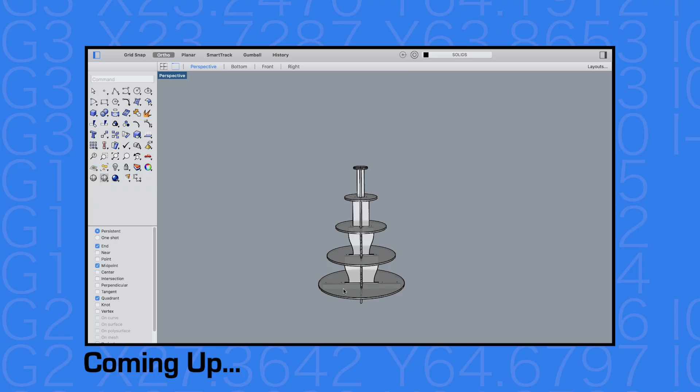Christmas is not very far off and we got a neat holiday product that actually started as a photograph. I'm going to show you how we brought that to life. Let's get started.

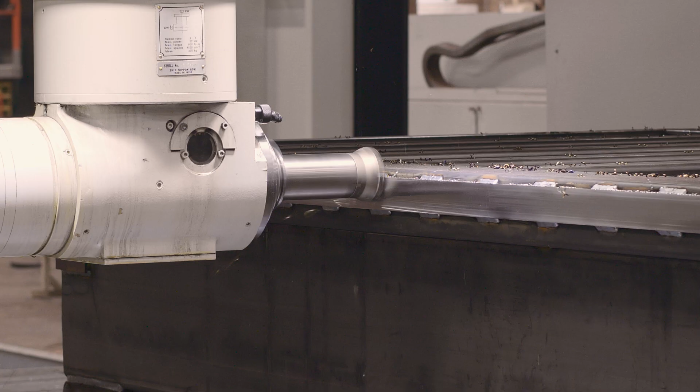The ISM Series represents our highest level of technology at ShopSabre, and they're part of our machine tool grade router group. The base frames are structural steel, all welded, single piece. All the machining is done in a single setup on an aerospace mill, which is where you get so much accuracy and such great edge finishes. We use that same technology when we fabricate the gantries.

Ball screw technology is an important part of being a machine tool grade CNC router. Ball screws eliminate play, can handle heavy loads, and are virtually maintenance free. That concept also carries over to precision contour guide rails, which also operate with ball bearings. Bottom line, you get better parts and better accuracy because of this technology.

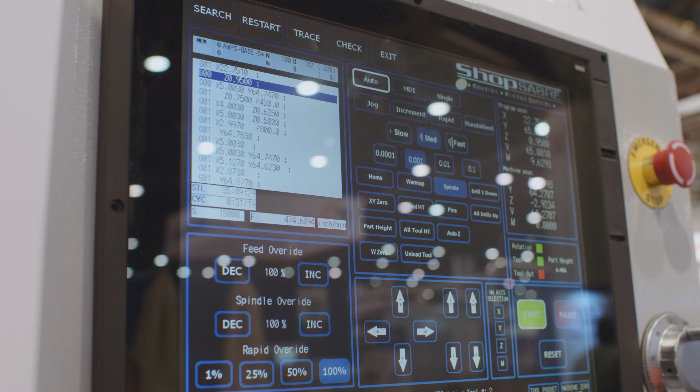The ISM Series CNC routers come standard with the world's fastest dedicated machine controller, the Mitsubishi M80. One reason the controller is so fast is because the internal communications are all handled with fiber optic. But there's another part to machine control that has to do with the servos and drive motors. The closed loop digital servos have glass encoders that supply 1 million counts per revolution. With that much data available and the speed of the control, you get really high performance on the machine and extreme part accuracy.

But we were able to accomplish all that and still maintain the ease of use machine control that we're famous for at ShopSabre.

This machine features our optional 10-position carousel tool changer with HSK tool holders and the optional 13 horsepower HSD spindle. And we have a 9-spindle boring block that we'll be using in our demonstration today.

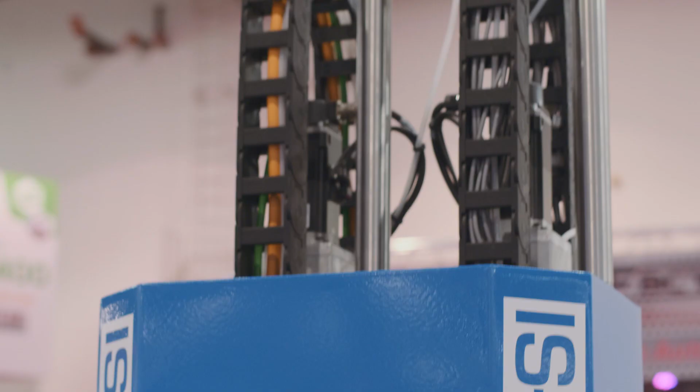The machine we're using today features our exclusive ShopSabre Super Z technology. It starts out with balancing cylinders, which bring you faster 3D machining and faster drilling. It comes with our tool plate stiffener system, which equates to better edge finishes and better accuracy. And finally, all of this is driven by a closed loop digital servo driving a ball screw.

This machine features our exclusive ShopSabre high-flow vacuum technology. It starts out with a table that's totally machined on the machine itself, so it lines up perfectly with the spindle. In fact, it's so accurate you don't really have to have a gasket between the table and the spoil board. The grid system we developed to interact with the spoil board has about two-thirds more flow than a typical universal table, so you're going to get more vacuum to hold your parts.

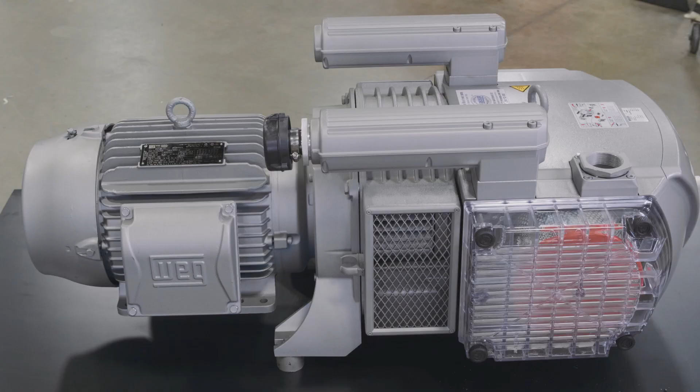We connect that internally with hard pipes, and they're large hard pipes. In fact, there are 4 zones on this that you can control. Those hard pipes flow into a large frame component that becomes a vacuum plenum. Then to the back of the machine, we feed a 4-inch hard pipe, and on the end of that pipe we connect brand name vacuum pumps.

This machine features our optional part locator pins, which makes it easier for you to load and unload the machine.

Now that we've talked about the machine, let's go in the office and actually look at the project we're going to produce. This is a time of year when people start putting up holiday stuff. They put up Christmas lights and you see stores decorated. We also like to do some kind of Christmas project this time of year, and this year we've got something really neat that I think is going to make a great video.

We started with basically just a photograph of a Christmas tree display. It's really a series of shelves in the shape of a Christmas tree. All we had was a basic concept, so we started from scratch and designed this. I want to show you the steps we took to accomplish this.

We basically did the design work with VCarve PRO, but I took those parts and created a model and render just so you could see what the project's going to look like.

Here's the final design, and it's basically a Christmas tree shape. You can see what people do is they put all kinds of little things on here. In fact, you might have a little train going around here. It really creates a great place to display your Christmas ornaments and things, and when you're done and it's decorated, it kind of looks like a Christmas tree.

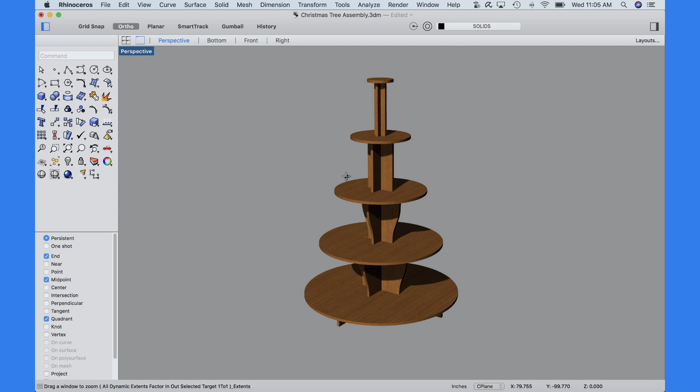So let's take a look at how this thing's actually put together. This is a ghost view, so you can kind of see inside. Basically, it starts out with 2 pieces that form what I call the trunk, and they actually fit together.

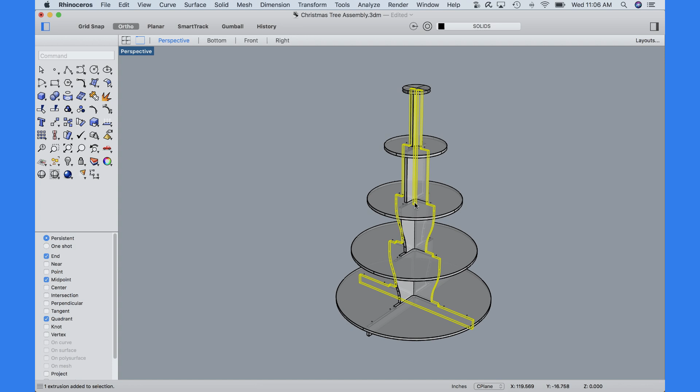Here's what the other one looks like, and they have a notch, so there's a lap joint in the middle that forms the tree trunk. And then these discs, there's 5 of them, actually installed from the top. They go down and rest on these surfaces down here, so they get stacked, and that gives you the ability to assemble and disassemble it. So that's the idea, and then the top is flat, so you can place something on there.

So that's what we want to create. Now let's take a look at VCarve Pro, and I'm going to walk you through the steps of how I actually created this design.

The project had to be made out of 3/4 inch 4x8 sheets of Baltic birch. I selected Baltic birch because there aren't any voids in it, so it's a really nice material. Now, I already decided the disc was going to be 48 inches, so the next thing to do is figure out what the height's going to be. Let me show you how I did that.

The job setup is single-sided. The material's 4x8, it's 3/4 thick, and we're touching off to the top of the spoil board.

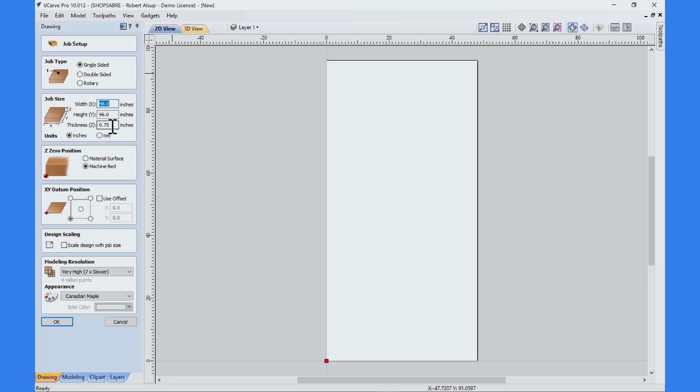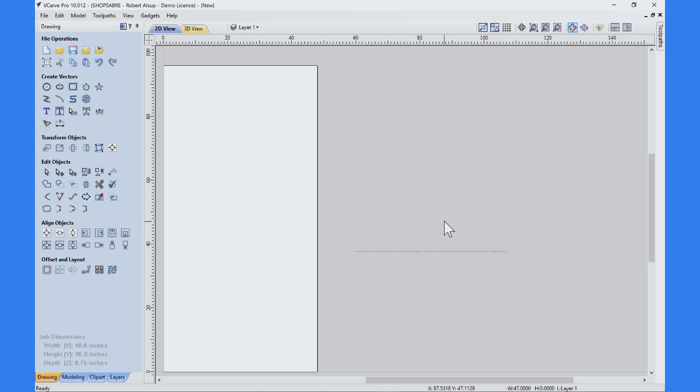Now we need to make some drawings. Let's start over here where we've got a little more space. Let's start with a line first, and it's going to be 47. So what I'll do is draw the line and then just size it, and I'll tell it I want that to be 47. Now that represents the diameter of the base of the tree, or that bottom shelf that you see.

So that's what starts. Now the question becomes, how high is it going to be? Well, here's what I know: the height's going to be from a midpoint, and we'll just select that, and then resize it this way. So we'll say, okay, I want to anchor it down here. All right, now what size is it going to be? Well, right now it's 58.

Well, let's calculate it. To get the golden ratio, basically the height has to be 1.618 times the base. We know the base is 47, so 47 times 1.618 equals, and that gives us our height. Now that's that magic proportion, that's the golden ratio, so now our tree should look great.

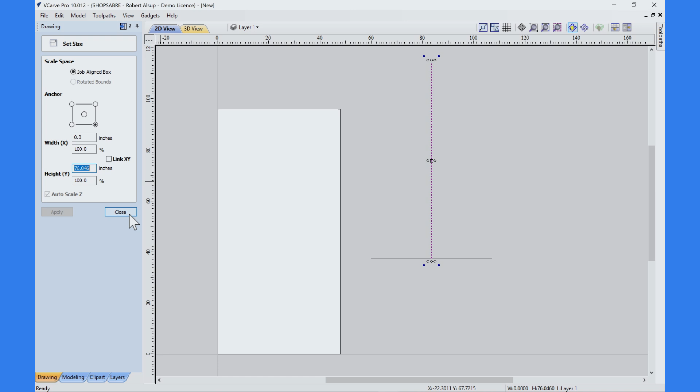Now, once we've got that done, let's put some more lines on here. Let's connect that to that, and we'll do the same thing here, so that becomes a cross section of our tree. The base of our triangle is actually the surface of the bottom shelf.

Let's put the top shelf in. So we'll snap to that point, draw a horizontal line, and move it. I'm going to move it down 12 inches, so relative Y position minus 12. That gets it at the correct height, and then move it over, and we'll trim it. So we'll get the scissor tool out.

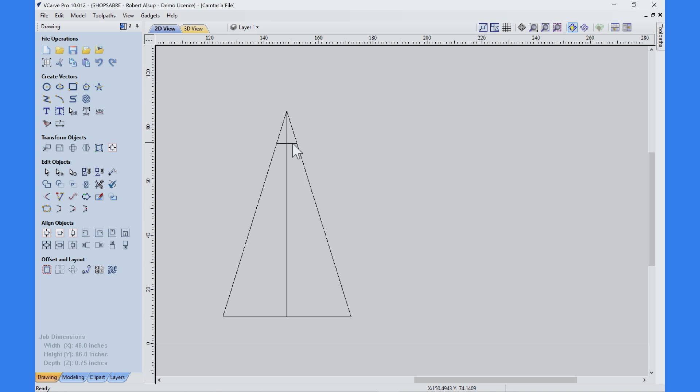So that becomes the top surface of the top shelf, and this is the top surface of the bottom shelf. Once we know that spacing, we can figure out the other spacing.

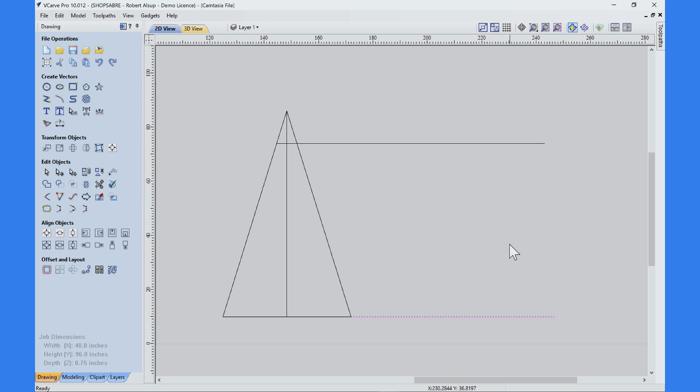I'm going to show you a way to do this without calculation. It's real simple: you start out with a line, so we'll snap to right here. Draw it horizontal, doesn't matter the length. Same thing here. Then we'll draw a vertical line, and once again it doesn't really matter where you put it.

We'll trim that with a scissor tool. Select that line and use the array tool. We're going to do 5 columns 3 inches apart.

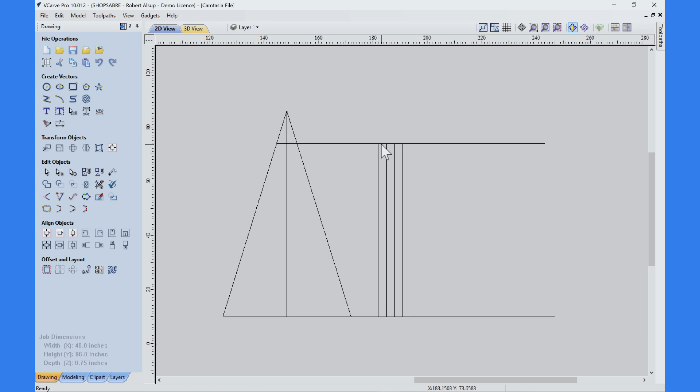Now we're going to create a diagonal from here to here, so let's do that. So draw a line, we'll snap it here and snap it there, and you notice some intersections form. Here's 1, 2, 3 -- that happens to represent the height of those shelves, and it's equal space. So snap to that, just go across it, same thing, and finally we'll do the third one.

And then all we have to do is use the scissor tool to clean those up. And finally, let's get rid of this.

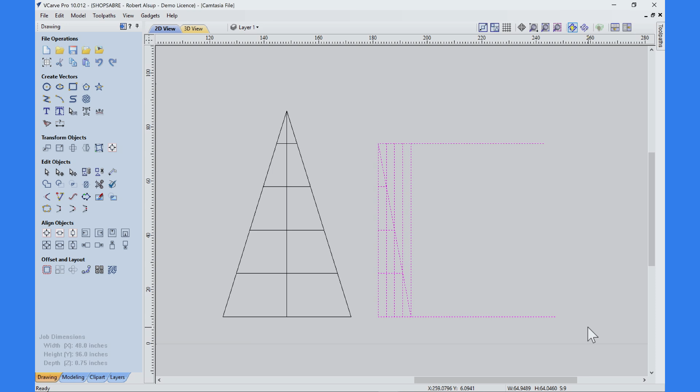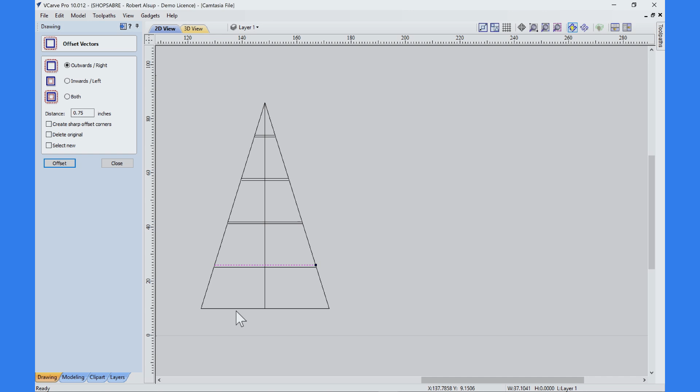Now we'll use the offset tool to actually create thickness. So we'll see if that's correct. Okay, that's correct. And that's correct. And that's correct. I believe this bottom one was drawn differently. That's correct, so perfect -- now we've got the actual thickness of these shelves.

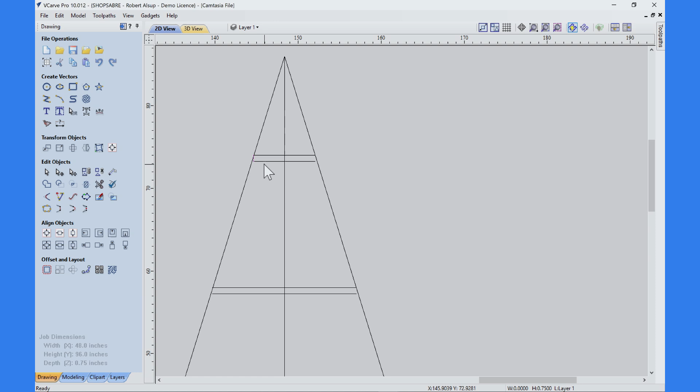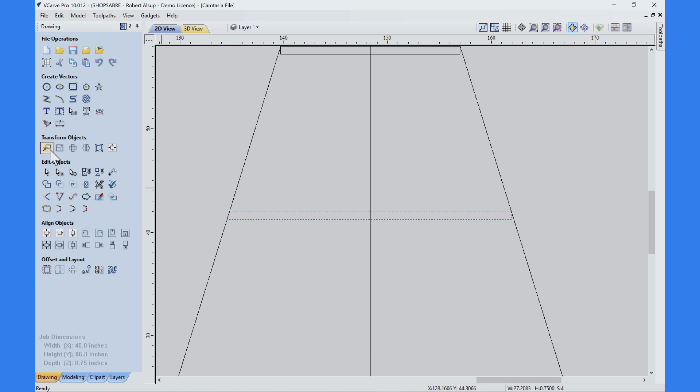Now let's draw the ends on these shelves. So we'll go from there to there, get a little closer, and then we'll join that. Same thing here, join that. Same thing here, join those. Same thing here.

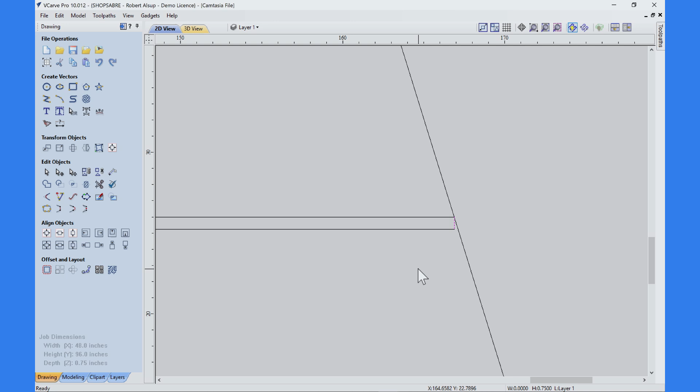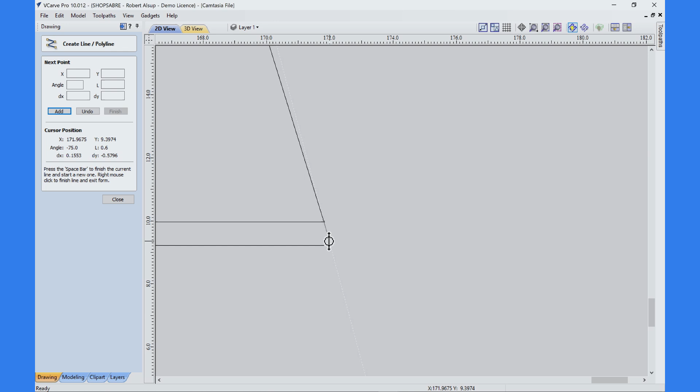Join those. And finally, we'll do the bottom one. And finally, we'll join those.

Select the shelves. This time let's right click, move to layer, new layer. We're going to call this layer shelves, and we will make it red.

With the overall shape of the tree defined and the shelves in their places, now we can get started on designing the trunk.

Let's make a copy of our tree, so I'll select it, right click, copy, right click, paste, and then I'm going to select it and drag it over here. We'll actually work on this.

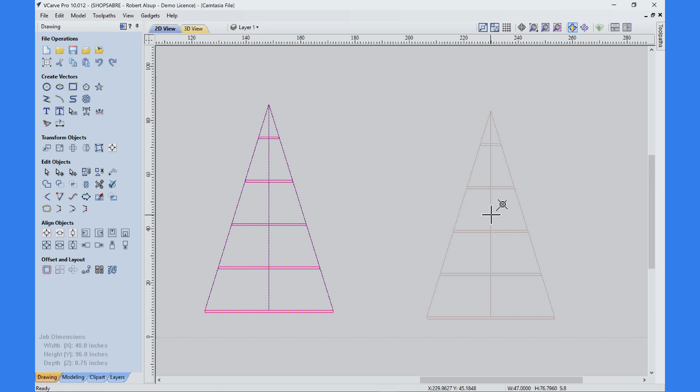Okay, let's take the scissor tool and let's get rid of half of this. So we'll get rid of those. Get rid of that.

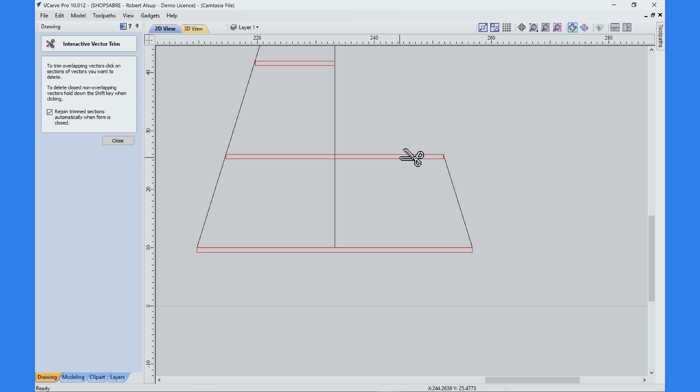The reason is when we're designing the trunk, we really only have to worry about half of it because we can mirror it once we get it done. To make this clear, let's go ahead and put those back on that layer called shelves.

Okay, so that's what we have to go with. Now what's going to happen is we're going to have to put these shelves on, the biggest one at the bottom. So let's do this first.

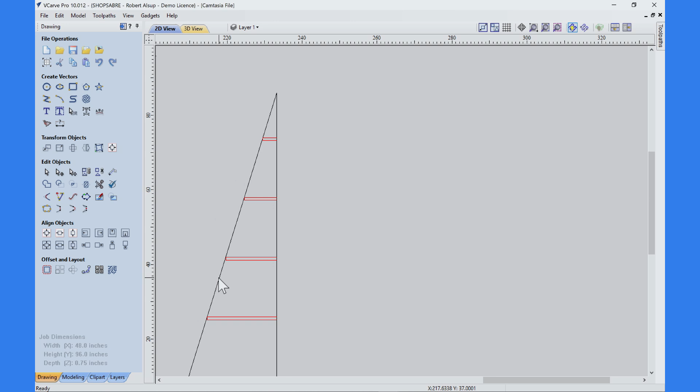Okay, so let's say, all right, I'm going to go from this start point at the midpoint straight down, and then we'll trim that. So that's how we'll determine where each one of those lines is.

So that starts at the midpoint of that shelf, down to here. Same thing here as we'll just keep going down. And that determines our spacing. There's the midpoint.

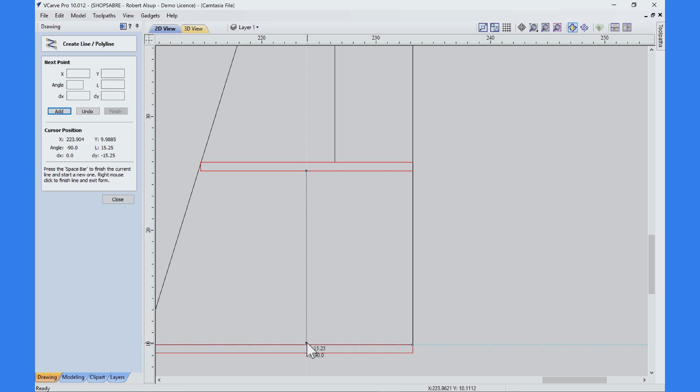That looks great. Okay, let's go down here to the bottom. We need to add our base rail on here, and it's going to be about 3 inches.

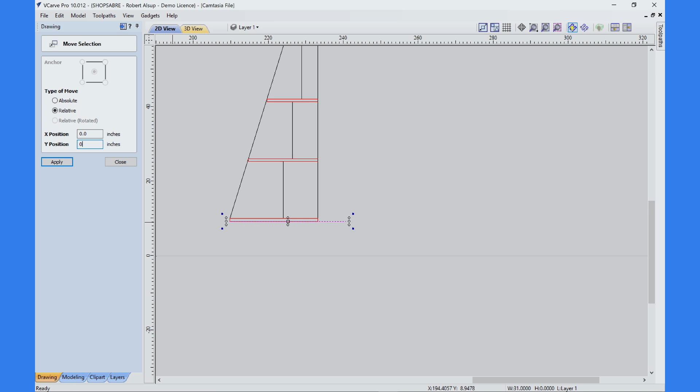So let's just do this. Let's bring it out here, and then let's just move it down relative to where it is, minus 3. And then we're going to actually move it back 3.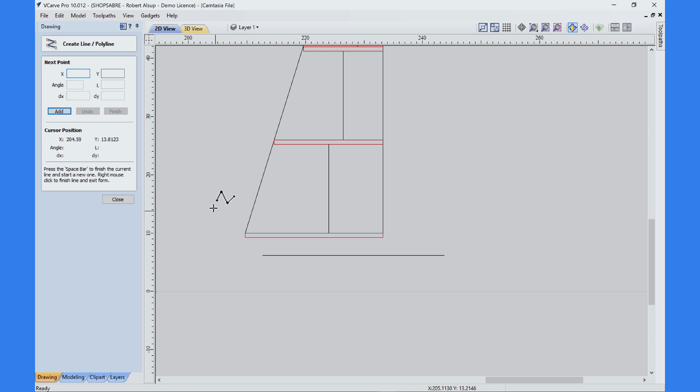And then we'll finish our line. So then we'll bring this up. And we'll bring a line down here. And we'll just trim it.

All right, there's enough information. Now we can start figuring out what this shelf's going to look like. So let's get the scissor tool out. Let's start clearing stuff off.

So we know it's going to basically come up through here. Whoops.

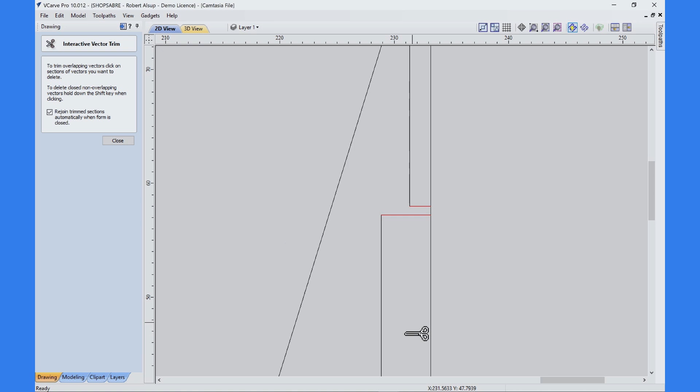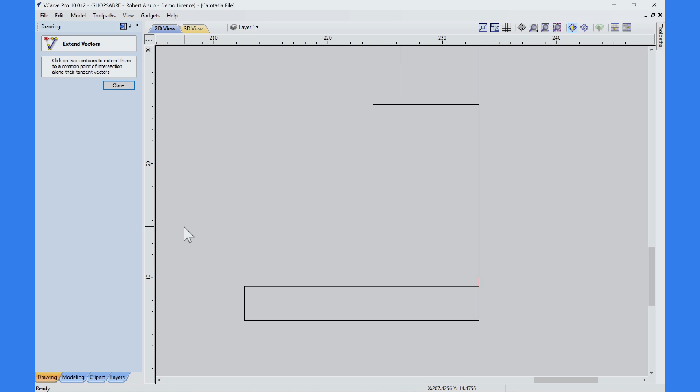Now let's clean up some geometry, so we'll use this tool, and that'll allow us to extend these. So that's our basic shape.

And this one we can clean out here, and we can clean this one out. These I'm not ready to clean out yet.

Now, I think I want to change these shapes up here a little bit to give us more room. So I think what we'll do is we'll basically put some kind of curve back here.

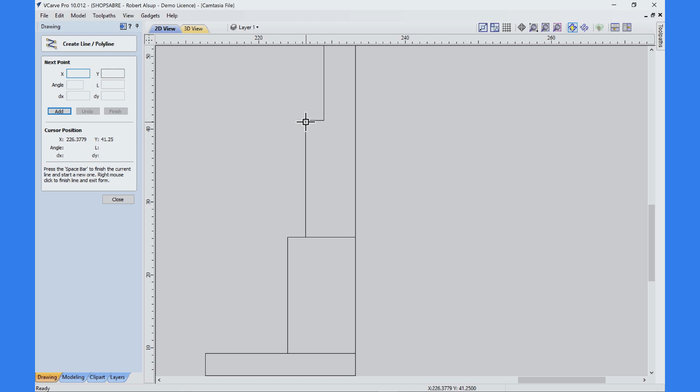So the first thing is, let's do this. Let's take a line here, just a marker. I'm going to move that down 3 inches, minus 3, that's just a construction line.

I'm going to do the same thing right here. Put another line in here. I'm going to move that down 3. Okay.

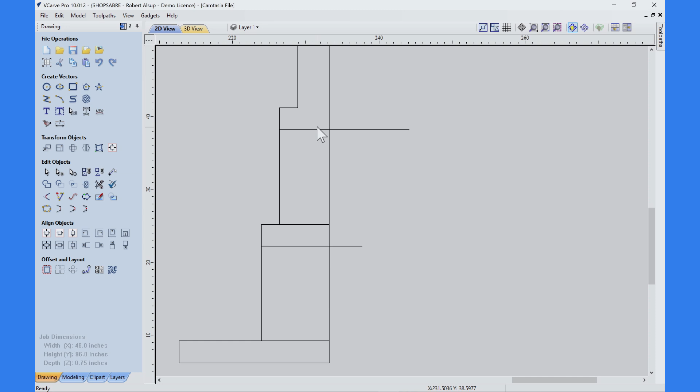All right, that looks pretty good. Now I think what I'll do is select that line, resize it, anchor this corner right here, and I'm going to make that X direction 3. I'm going to do that same thing here.

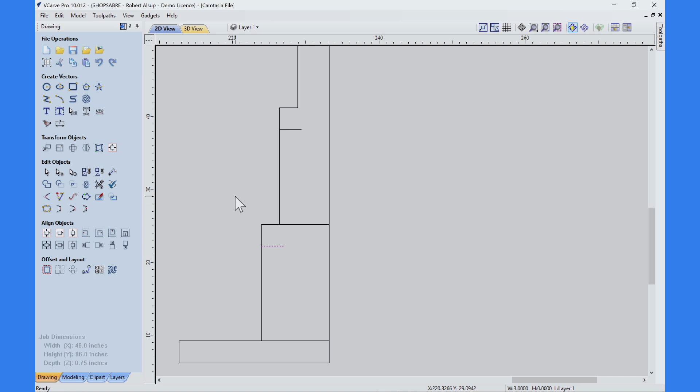And then we're going to just create a line straight down to here and straight down to here. Same thing.

All right, now here's how I'm going to create this shape. I'm going to use an irregular curve. I'm going to go from diagonal to diagonal.

All right, and if I hit the node editor, I get the handlebars. And let's bring those over to the midpoint here and to the midpoint here. That gives us a really nice curve.

Let's do the same thing here. Irregular curve from here to here. Okay, we'll hit the node editor.

We'll drag the handlebars out here to the mid. We snap to the midpoint. So let's bring this one down. There we go. Now that'll be very, very consistent.

And then we just bring the scissor tool out and clean up what we don't need. So that's a really nice way to add a design to it and be consistent with it. Now once we know that, we can also get rid of these.

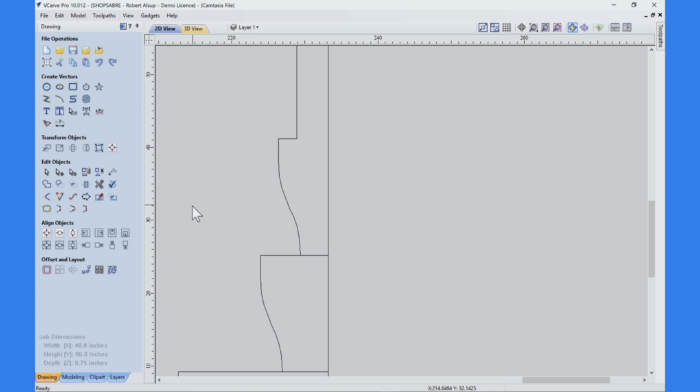And we'll get rid of that. Get it there closer. There we go. And let's add a line here.

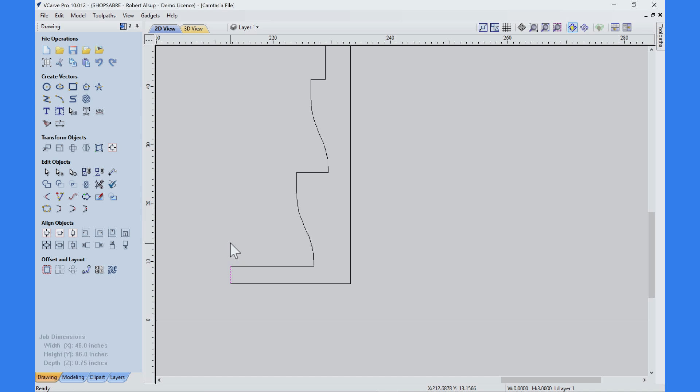Now I want to add one more feature here, and that is, let's come over here where this is coming down, let's just bring a line down. And we'll trim that.

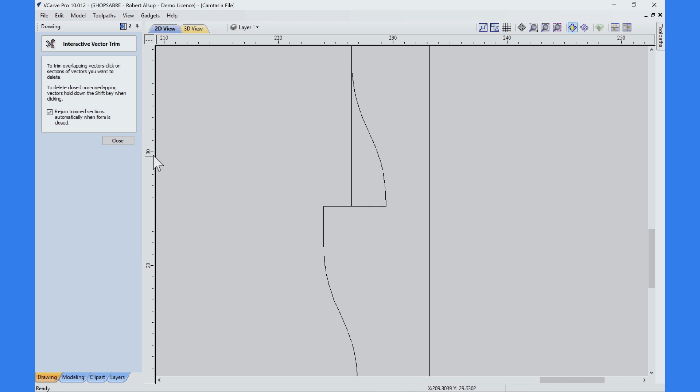And then we'll bring a line, let's just do it this way. Just snap to that corner, bring this line out. We'll move it, and we're going to move this up Y at 0.75.

And we're going to trim that up, and I'll show you why. So we'll get the scissor tool out. We don't need that segment. We don't need that, we don't need that.

Now here's why I did that. Basically that shelf sits right on here, and this basically lines up with the top of the shelf, and it gives us more clearance when the entire unit's assembled.

And I'm going to do the same thing down here at the bottom. We're going to bring a line down. All we're doing is just getting a measurement here. And then we want to bring a line up here that's going to represent the thickness of the material. So we'll just draw the line and move it up, the material thickness. So that's 0.75. And then we'll just clean it up.

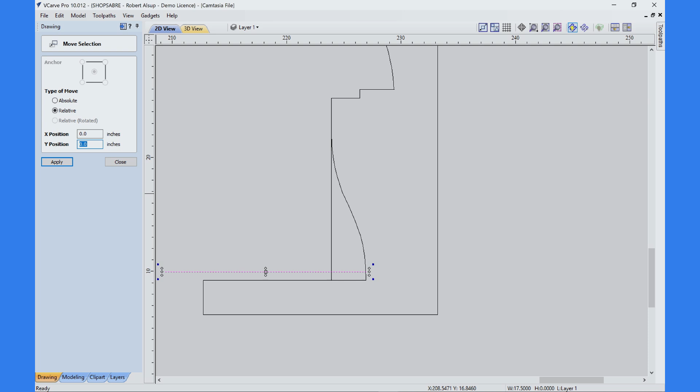So we get the old scissor tool out, and we'll cut away what we don't need. I don't need that, I don't need that, I don't need that. And that should be it. So that's our basic shape.

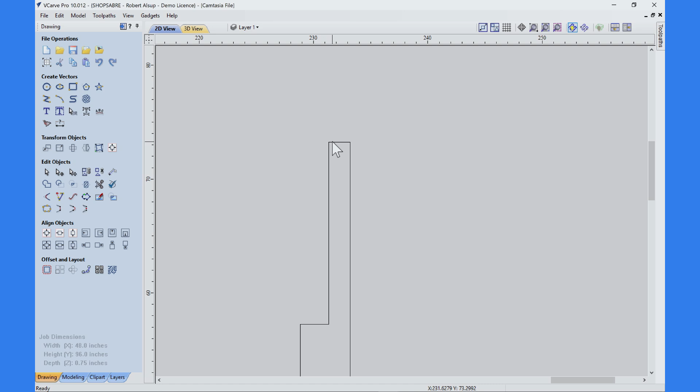Okay, let's do a little housekeeping here. First, this tip is actually sticking up into a dado that's 3/8, so we need to move that up. Well, how do you do that? Well, let's hit the node editor, and then we'll just cut those.

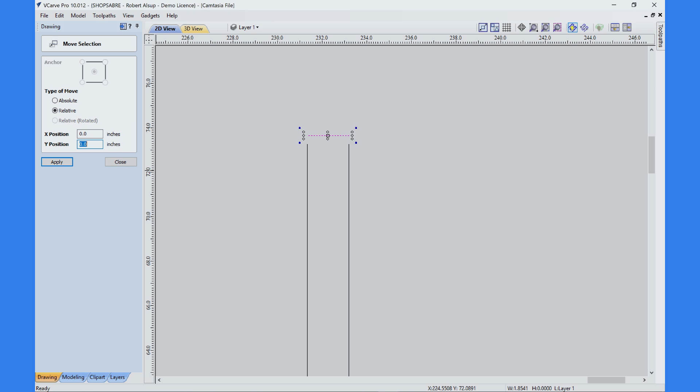So we'll cut that vector here and here. Okay, and then we can select it, and we can move it up. So I'm going to move it up in Y 0.375. That takes care of the depth of the joint, and then we can use that extend tool to fix that. So that's this.

Okay, so that fixes that. Now, there's another thing you have to consider, and that is you have panels here. You basically are going to end up with a round corner in here, so we're going to use a dog bone to take care of that.

So this is where you find the dog bone fillet, 0.19, so I'm going to click that. Same thing here. Anywhere it's going to sit in a corner, make sure you cut some clearance. Now, this one actually sits right in here, not in there. Same thing here, right in here.

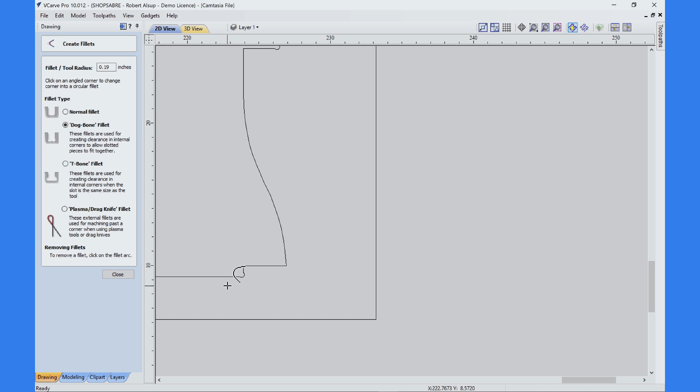Looks pretty good. Okay, so that's half of the shape for our pattern for the trunk. Now let's clean this up, make sure it's joined together. Okay, that looks great. Let's use the node editor to get rid of some lines we don't need.

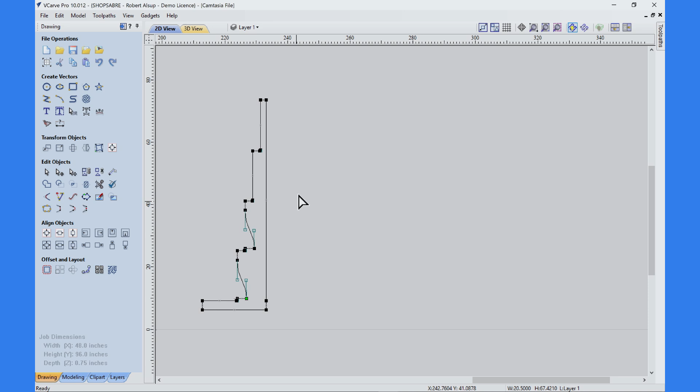I don't need that. And let's go down here. I don't really need that. Let's go to pick the, there we go. And then we'll turn the node editor.

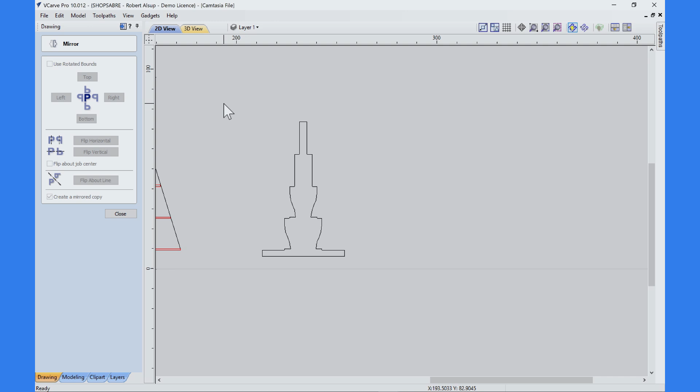Okay, now all I need is a mirror image of that, and I'll just say right and there, and then let's take those and let's join those together. Okay, perfect. Now I've got it. So there's the cross section of the trunk.

Now let's see what we have to do to turn that into an actual part. Okay, now let's create a center line from here to there, and then we'll offset that center line 3/8 on both sides, 0.375 on both sides.

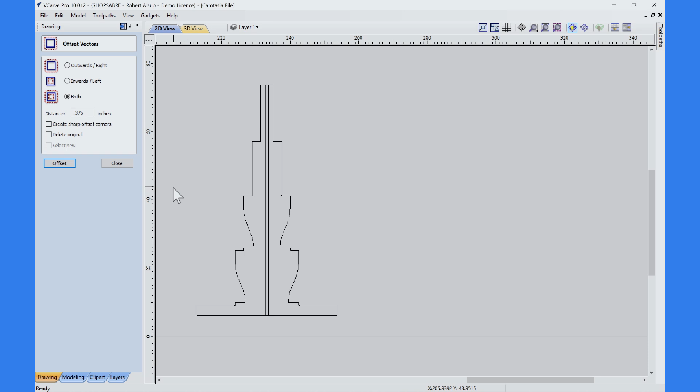And that's what we'll build our slot for the back to put these together. Let's do one more thing here. Let's take a line and draw a midline.

So let's come across here till we hit the midpoint. There it is. We'll draw a line across. Whoops, we'll draw a line across there. Whoops, so undo that.

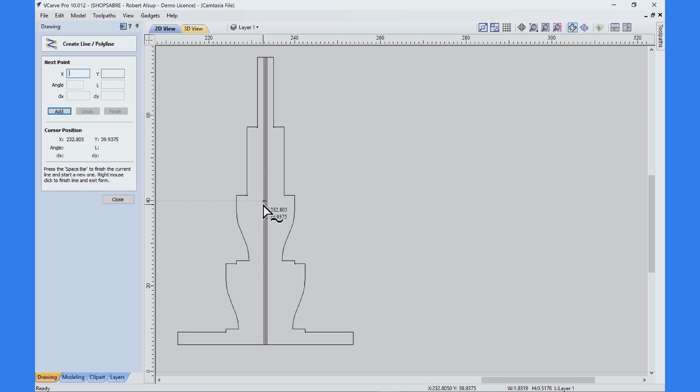We'll pick the mid. Okay, there's the midpoint. Let's go horizontal, and we'll trim that. Okay, then we don't need that midline anymore, we'll get rid of that.

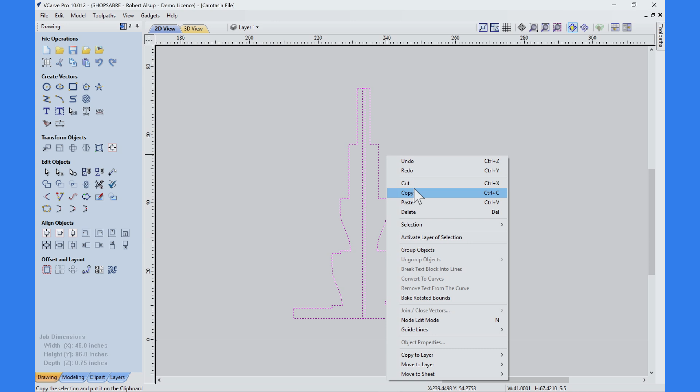Now what we'll do is we'll take this and we'll make a copy of it, and we'll paste it, and we'll move it over here. All right, now what we'll do is we'll make our left and right parts.

So let's get the old scissor tool out. Okay, there's a slot. Let's get in there close. There's a slot.

So that becomes our lap joint, and we're going to need to put a dog bone in there. That's done. Let's make sure that's all snapped together.

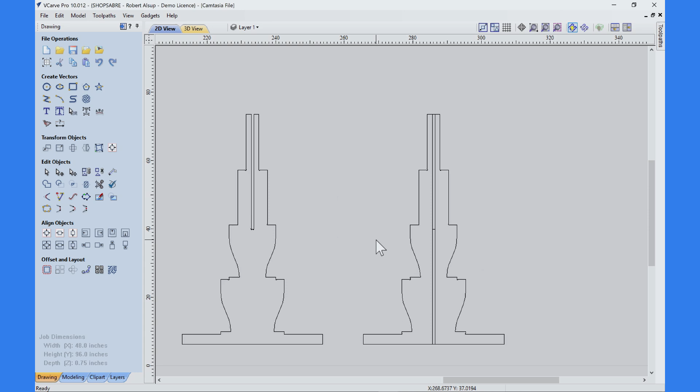Okay, that's great. And over here, we do the same thing, except this time, come up here, get the dog bone out.

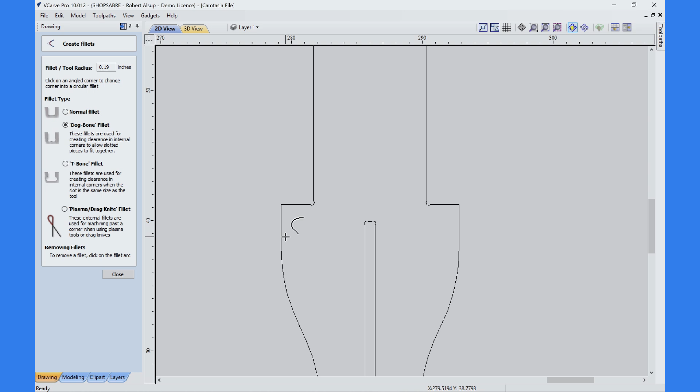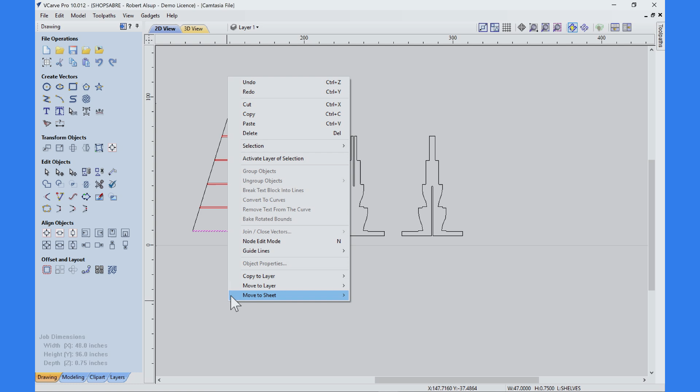Now there's our two parts for the trunk right there. All right, we've got enough information now to actually create our shelf. So let's take a shelf, right click it, and say copy and paste it, and bring it over into this area right here.

And we need to add a line to it, a center line. So let's zoom in there and snap to the midpoints of these ends. There's one, there's another. Now we're going to use that line to actually create the circle, so the center is going to be the midpoint of that center line I just created.

There it is, hold the mouse button down and we're going to snap right to the end. All right, that creates a diameter. Looks like we got extra. All right, perfect. Now at this point, let's group those together so they're one unit.

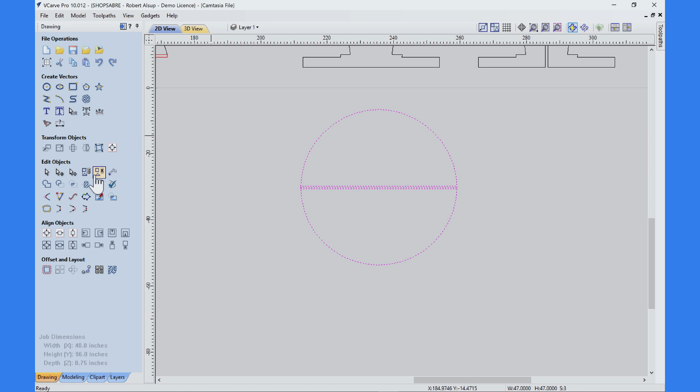And now we're going to hold the shift key down and center that, and that allows us to transfer information down. Be sure and ungroup it. Okay, now I just need a couple lines, so let's pull. That corner would be the correct line.

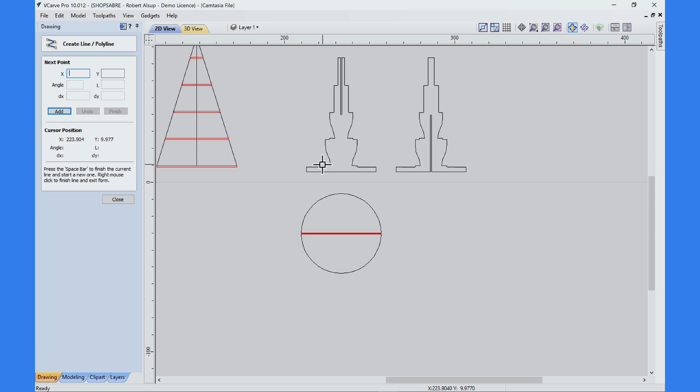So we'll bring that down. That's that dimension, and same thing here. Okay, now once we have those, then we'll get the scissor tool out, trim all that up.

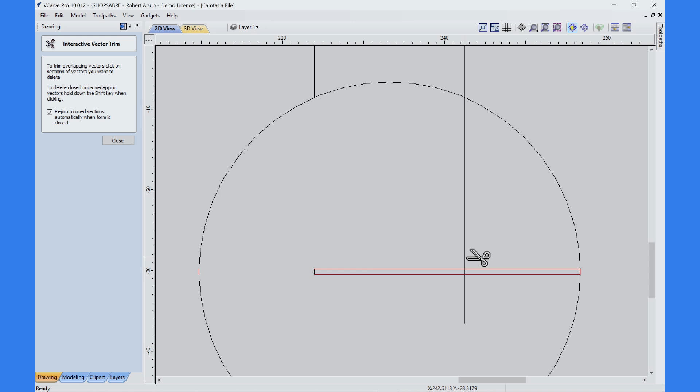Perfect. Now let's get rid of that, we don't really need that. Let's make sure this is grouped together. Join, yep, okay. Now the next thing I need to do, so that basically defines the length of this.

Now let's take this and let's rotate it. First, let's copy it, so copy and paste. Then let's rotate that one 90 degrees. And then we can just clean it up with a scissor tool, and that's how you determine the cutouts.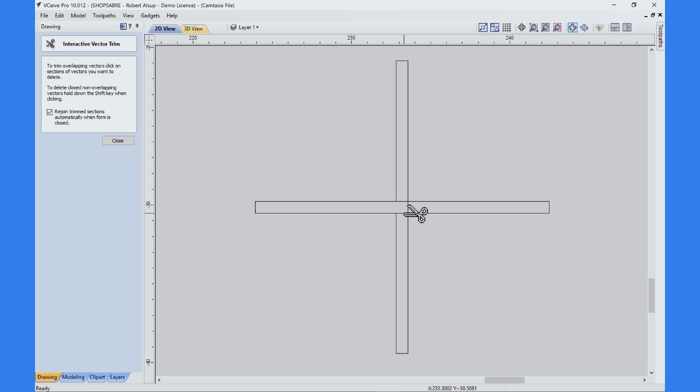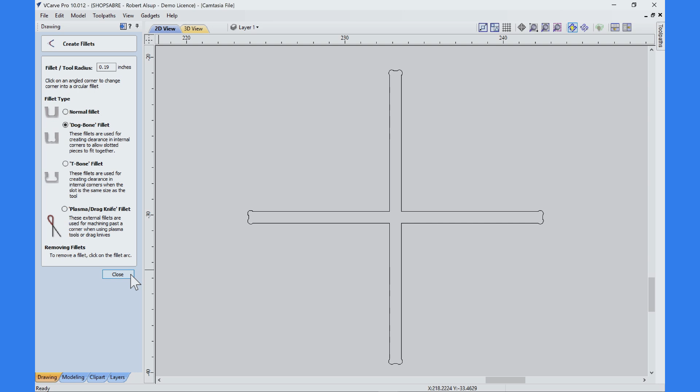And of course, the final thing we would want to do is to put our dog bones in. So that's what that looks like. I'll show you one more thing. Let's do some housekeeping and get rid of that.

There's one more thing that you'll probably want to do, I did on mine, and that is cut some clearance, because think about, there may be things that plug in on these shelves, so we need a way for wires to pass. So here's how I did it.

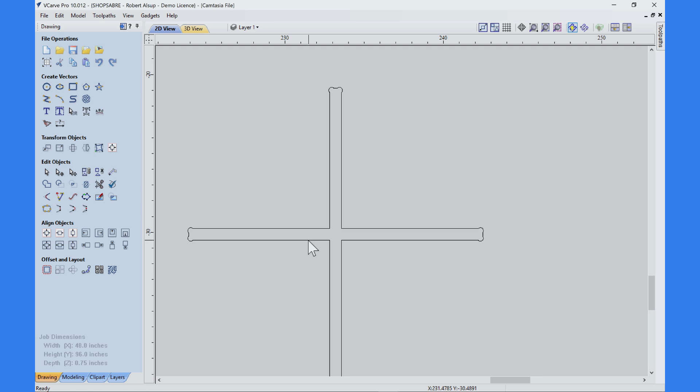I started first with a line off a corner here, and what I was looking for is 45 degrees. There it is, I don't care what length the line is. Then I'm going to take that line and offset both sides of it a half inch, so that's 0.5. Okay, we'll close that.

And then I actually want to create a line across from that intersection to that intersection. And we just get rid of these, these are construction lines.

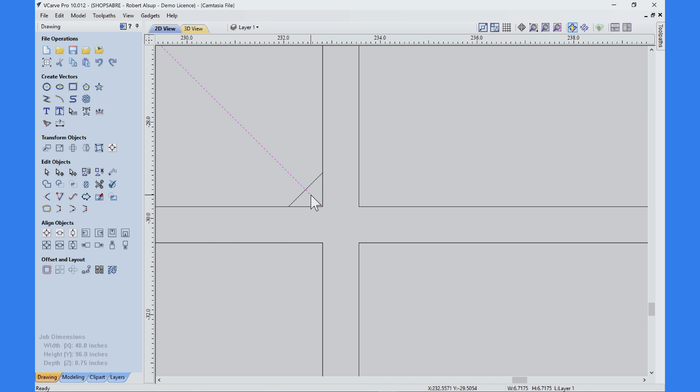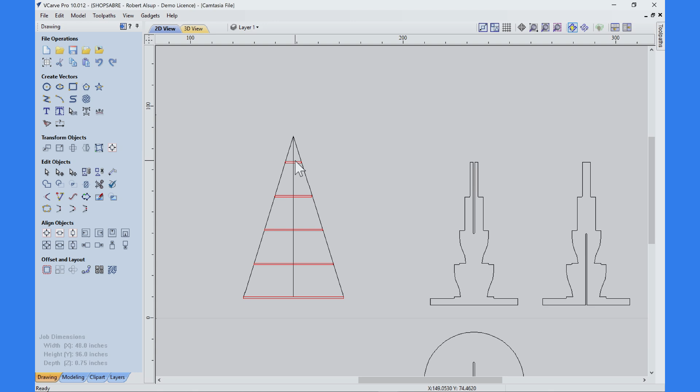And then you can use your scissors to trim that out, and you do that on all four sides. So that's basically, you don't have to do that, but you're probably going to find out that that's the way to do it. Now, the procedure I just did on this, you do on each one of these others. The only thing at the top that you don't cut through, you cut 3/4 deep, because that sits on top of it. Now, we've got all our parts defined.

The next step is to actually nest them. After I create all the parts, I put them into a single drawing so that I can nest them. Let's take a look at that. All right, there's the two trunk parts, and of course there's the shelves.

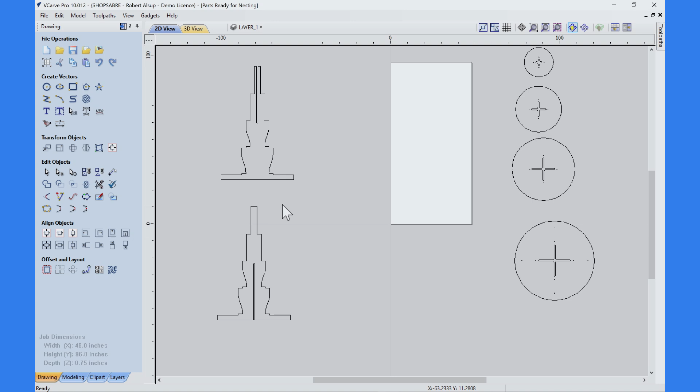Now, one thing that you want to know when you nest, if you have operations like holes and grooves, make sure that you group that together so that it treats it as one object. But all I really have to do is open up nesting.

I'm going to cut this out with a 3/8 tool. I'm going to leave an extra 1/10 of an inch of clearance, and I'm going to let it nest to within 1/8 of an inch. It's okay to rotate, but only at 180 degrees because of grain.

And all I really have to do is just select all these parts, tell them I want one of each, hit apply and hit preview, and it nests them. And it takes 3 sheets. So here's the first sheet, here's the second sheet.

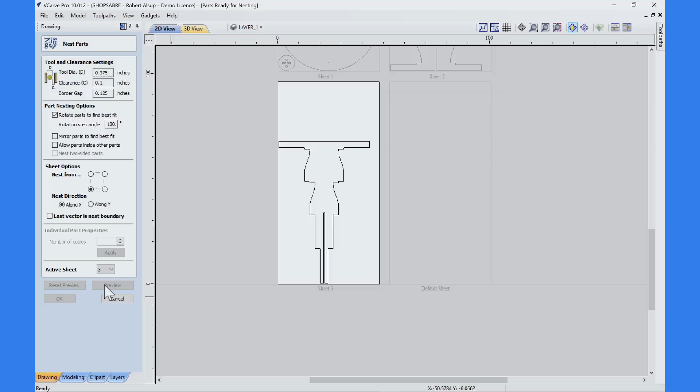And there's the third sheet. So now, once I'm happy with that, all I have to do is tool path them, and now we're ready to go out to the shop and make our Christmas display.

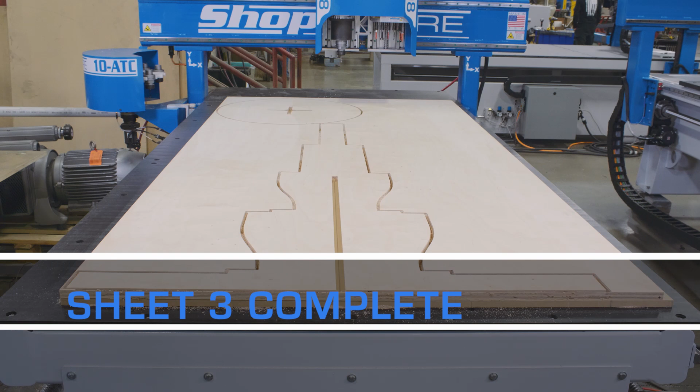Well, our Christmas tree display came out really nice. It's amazing what you can do with a ShopSabre CNC router. I hope you enjoyed the video.